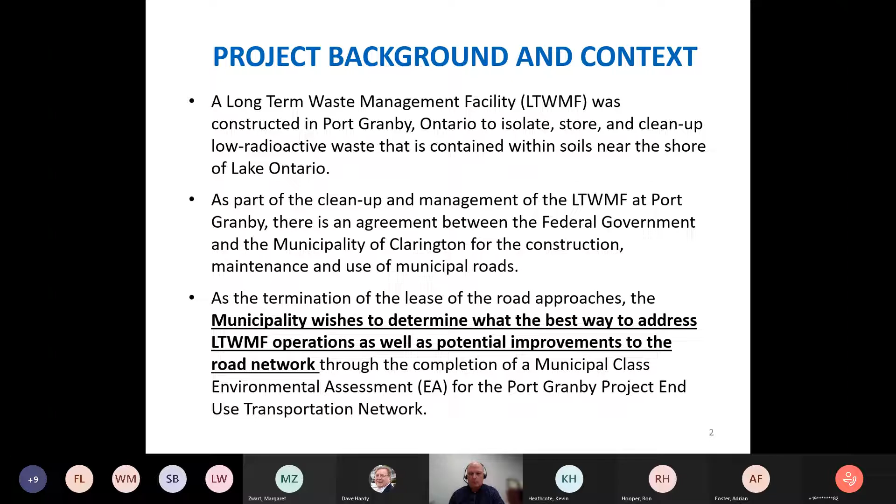Many of you are aware of the long-term waste management facility history to address low-level radioactive waste in the area. As part of this work, there is an agreement between Clarington and Canada relating to the roads in the area. As the end of this lease for Elliott Road nears, Clarington, through the completion of the municipal class environmental assessment, would like to determine the best way to deal with the low-level waste management facility operations and make improvements to the Clarington road transportation network in the area.

Slide number 3, long-term management plan. The Port Granby project is nearing the end of its construction phase and will be moving into the maintenance and monitoring phase, which will require CNL to continue to access the site for the long term. Access to the site is currently provided through agreements for use of Nichols Road, mainly for monitoring, and Elliott Road, which is the primary access, and which lease agreement expires at the end of April 2022.

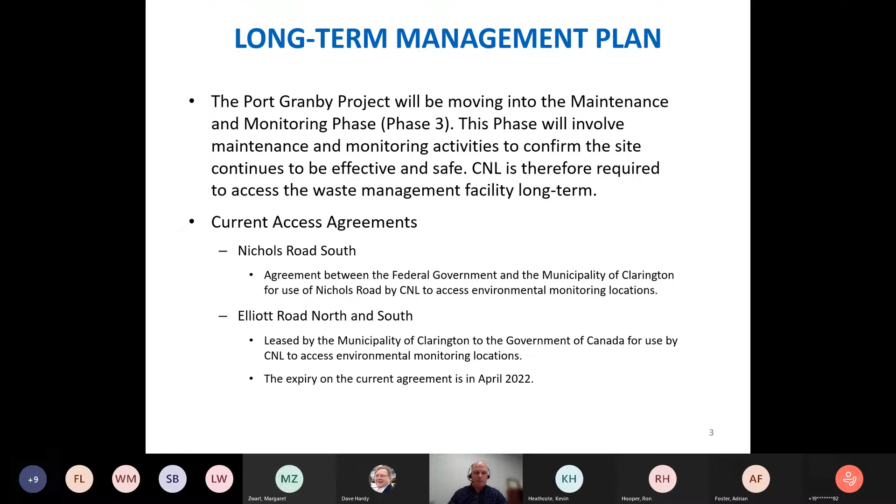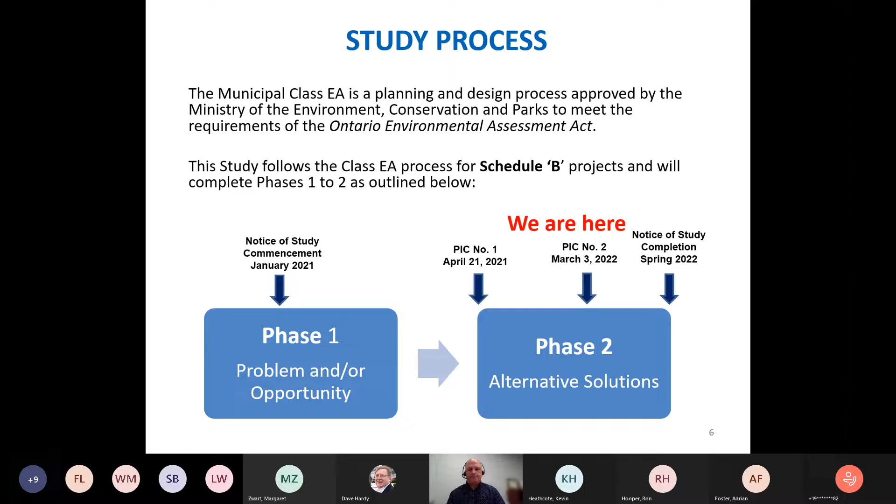Slide number 7. This is a slide showing the study area with an outline of the boundaries with Concession Road 1 at the north, Lakeshore Road at the south, Newtonville Road along the west, and East Townline Road on the east. The study area considered is provided on the map here and considers access to the area from east, west, and north. Majority of the traffic will be coming from the 401 at Newtonville Road.

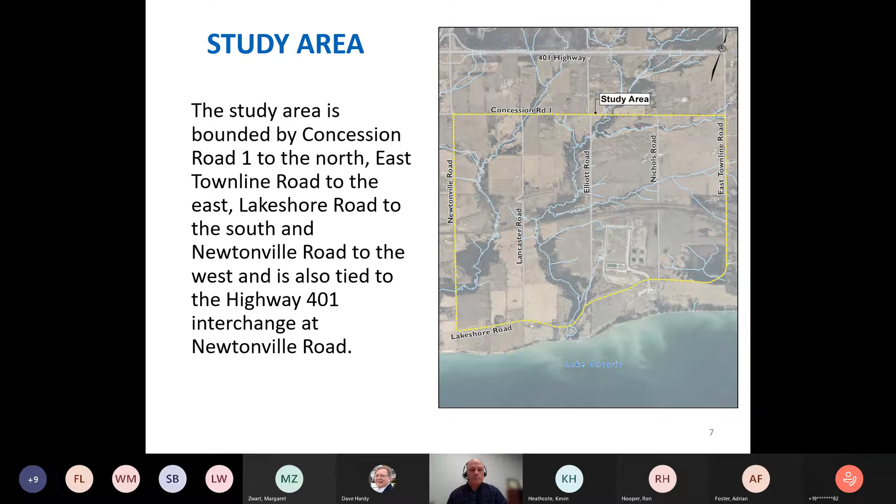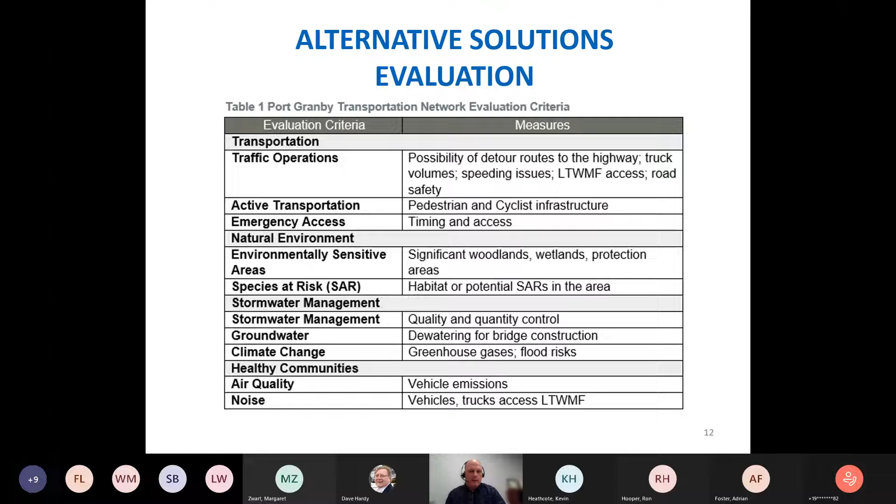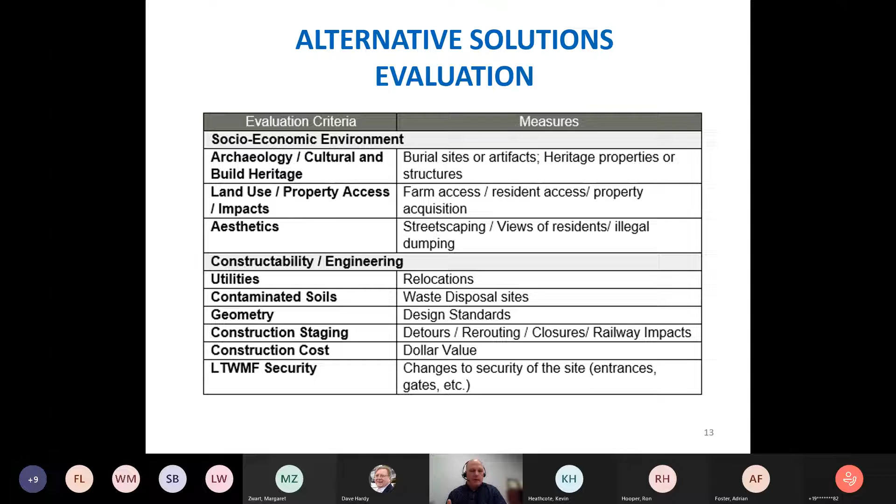Slide number 12, alternative solutions evaluation. This slide and the following slide depict the various criteria that were used in the evaluation of the four options. It includes such things as traffic operations, stormwater management, climate change, those sorts of things, as well as land use, property access, and construction staging and cost.

Slide 14. This is a summary table of the evaluation of the four options, summarizing the evaluation criteria noted on the previous two slides. Some options rated higher than others in different areas, such as option 2 had a higher rating for transportation, but lower in the impacts to the natural environment criteria.

The result of the evaluation determined that the do-nothing option, option number 1, maintaining the current Elliott Road arrangement, was the preferred option to move forward with.

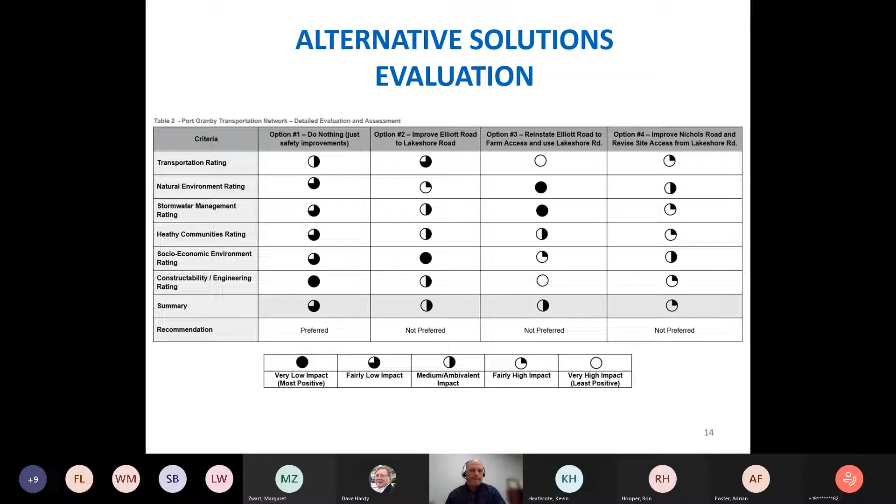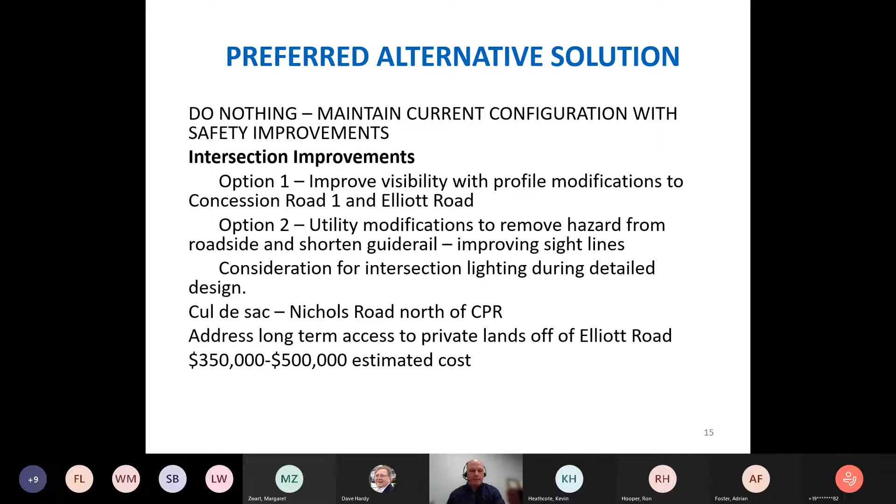Slide 16, preferred alternative solution. This slide provides a couple of photographs showing the visibility issues that are present at Elliott Road and Concession Road 1.

Namely, the sight lines looking westerly to oncoming eastbound traffic are obstructed by the presence of the guide rail on the south side of the road.

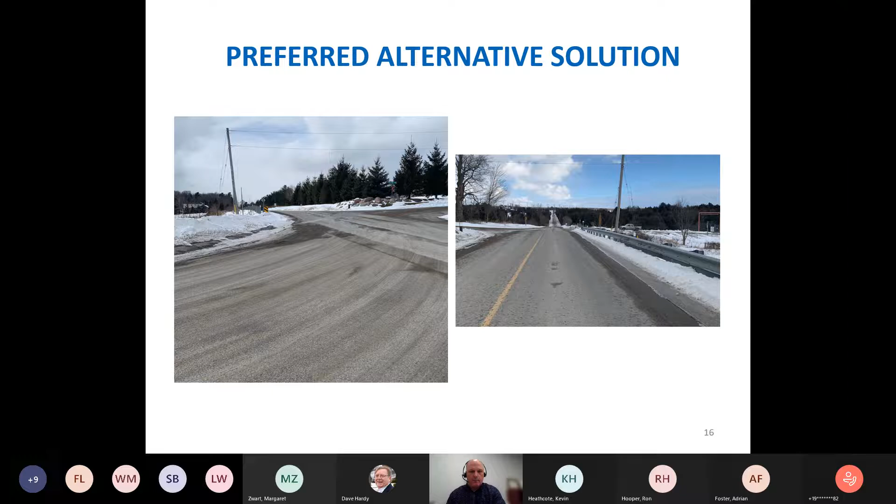Slide 17, preferred alternative solution. This slide provides an engineering drawing showing the improvements that would be made - geometric improvements to the profile of the road, flattening the curve to allow for better visibility.

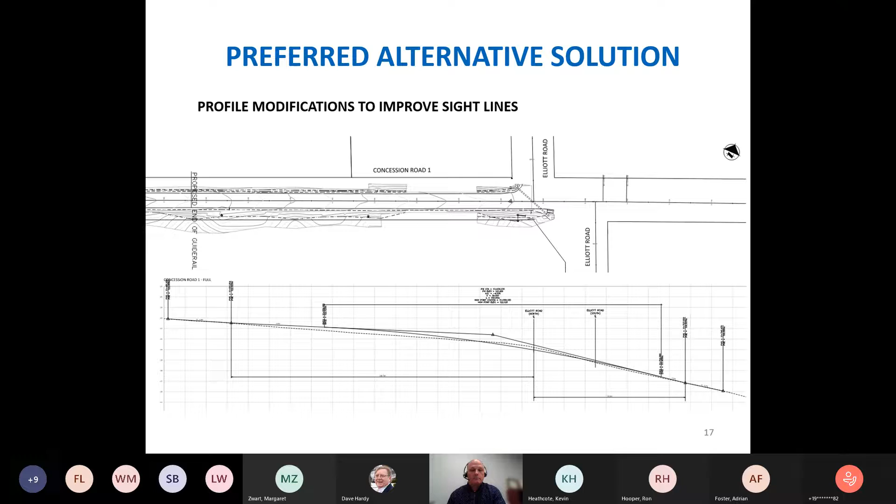With the guide rail removed, the sight lines for the intersection are greatly improved and would meet current road design standards.

Slide 19, preferred alternative solution, cul-de-sac at Nichols Road. This slide provides a map showing the location of where the cul-de-sac would be proposed to improve the current situation on Nichols Road north of the railway corridor.

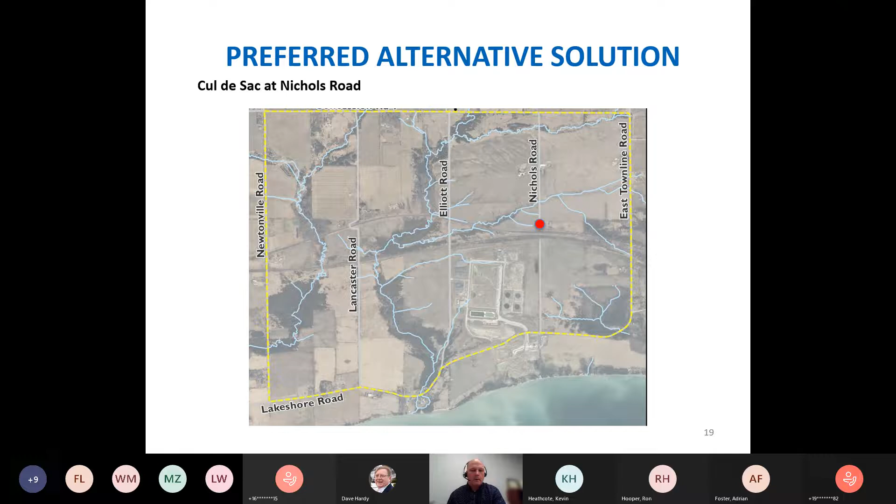Slide number 20, preferred alternative solution. This slide shows a close-up view with a preliminary conceptual design for a cul-de-sac at Nichols Road, north of the railway corridor.

And this is, again, preliminary in nature and could be revised to be an offset cul-de-sac to minimize impacts to property on either side of the road.

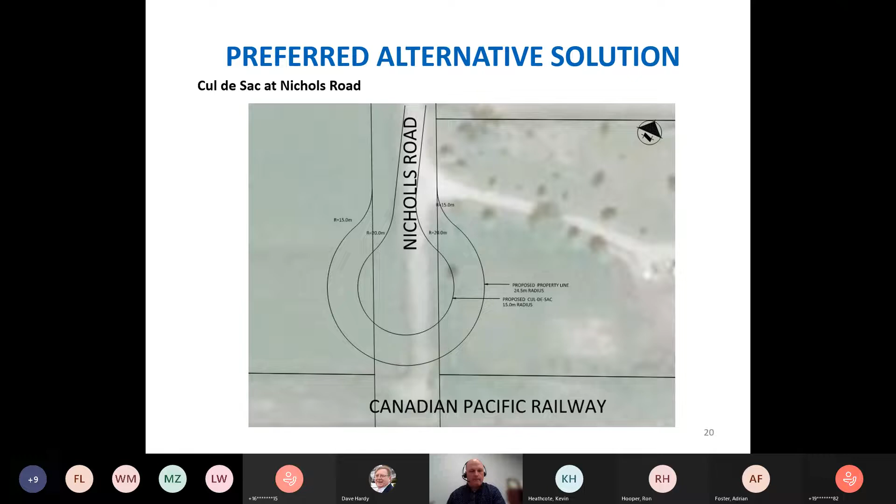Slide 21, preferred alternative solution. This slide provides a graphic showing the other concern that would need to be addressed, namely property access off of Elliott Road.

So currently, while the two northern properties have access to Concession Road 1, access to the balance of the properties is limited due to the presence of a drainage course through the area.

So continued access off of Elliott Road would be required so that farming operations that occur now can continue to occur. A similar situation for property access is noted at the south end of Elliott Road, just north of Lakeshore Road.

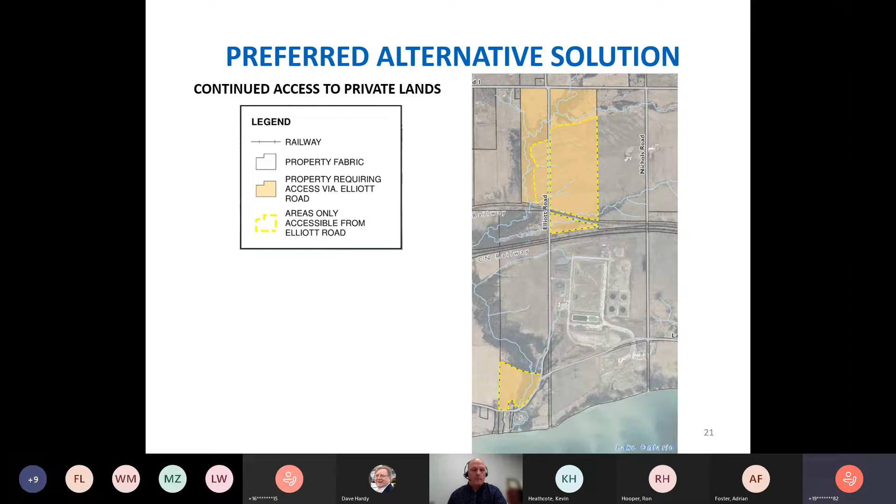Slide 22, next steps. This slide provides a summary of the next steps in this process.

Assessment based on the comments received from the public and other stakeholders from PIC number 2 information, they'll finalize the preferred design concept, and then we would look at finalizing and filing the project report to the ministry.

Circulate a notice of completion to notify that the process is completed. And again, it would be submitted to the ministry for consideration and completion of the EA process.

There is the opportunity to provide input via the website or to either of the email addresses provided on this page, to the manager at Clarington, Kevin Heathcote, or myself.

And if we could ask that this input be provided by March 17th, that would be appreciated so we can move forward with finalizing this EA. Thank you for your time, and that is the end of the presentation.

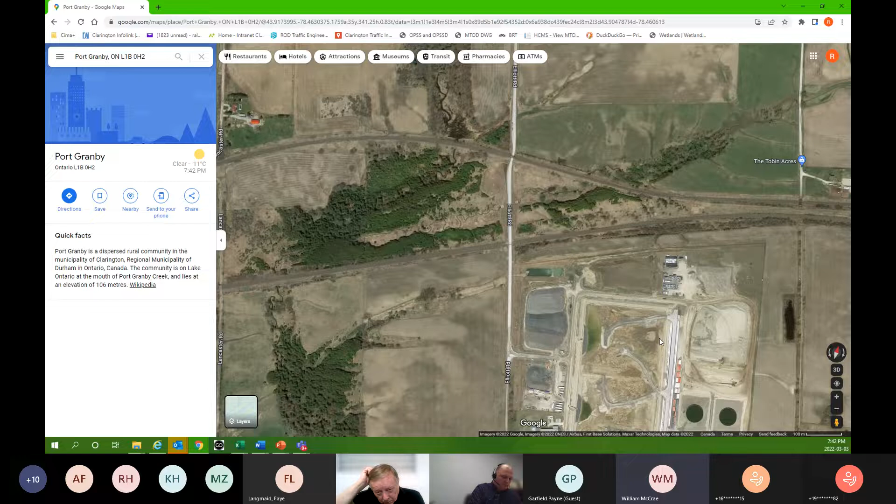I'm not entirely sure how long the monitoring program for the stream needs to be in place for the site. There is ongoing monitoring that will occur beyond this stage, but do you know how long that duration might be, Will? Yeah, those requirements are really part of the EA and would be the responsibility of CNL, so CNL staff would be able to answer those questions for us. But there is a long-term monitoring component to phase 3 of the project, and as Ron says, CNL can clarify what those timelines might be.

Can I ask the CNL staff on the line to make sure you follow up with our questioner to give them the response to that question after this PIC? Yes, I will. No problem. Okay, Dave, good, yes, thank you. Okay, we have another comment from Brian and Penny Strip.

Where exactly will the south end of Elliott Road come out to Lakeshore Road? Will it be where the gate is presently on the north side of the road?

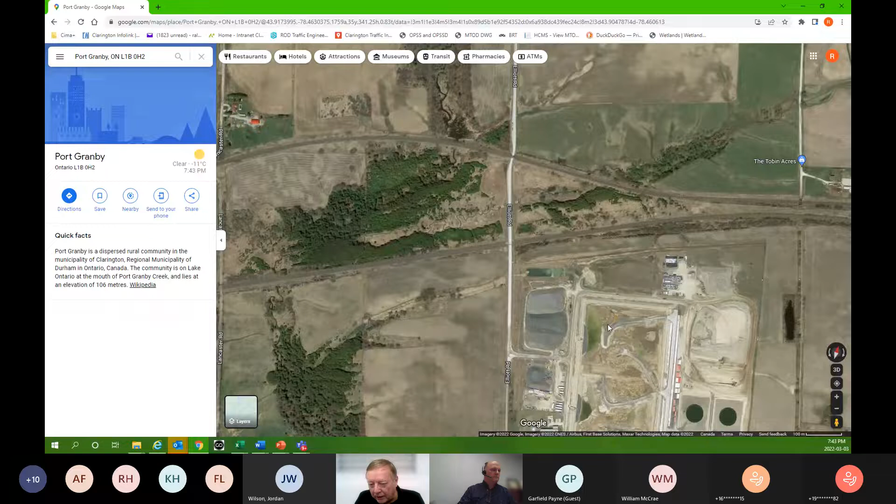So, through the original alternatives that were considered, we did consider both options: it coming out at its current location, or the alternative of it coming down Elliott Road, veering east and tying into the existing driveway, with the property boundaries adjusted accordingly to ensure the facility was still fenced and not accessible to the public. Through this evaluation, that option has been ruled as not preferred, and we're considering the current arrangement as the preferred option we'd move forward with.

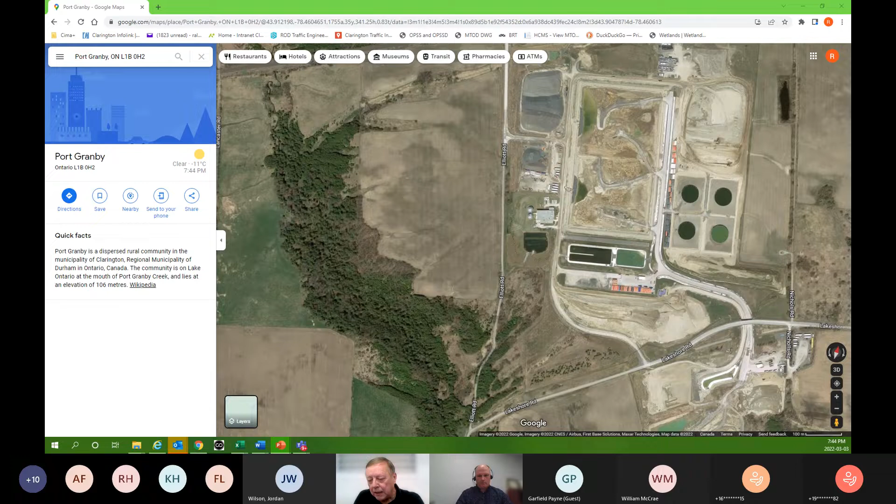So Ron, just to pinpoint their question: where exactly will the south end of Elliott Road come out to Lakeshore Road? So you've explained the thinking behind it, and it will come out basically where it's coming out now, is that right? Sorry. Yes, under the do-nothing situation, it will remain exactly where it is now, and no alteration will be done to it.

It will remain gated to deal with the illegal dumping, but it is accessible if there is a small property on the south end that gains access from Elliott; that would still be permitted. Okay, and I know we heard about that on the first Public Information Center, about the need to provide that access. For those of you on telephone, Ron had put the alternative route solutions slide up.

So Garfield, I know you have your hand up, I'd be happy to hear from you. Yes, will the underpass under the CP tracks, which goes down Elliott Road to the facility, be widened, or are there any plans to change it or modernize it?

I think it is probably 100 years old. Short answer is no. That was one of the things identified as part of the evaluation. Upgrading that was not part of the considerations, so it would remain as it is. It would be replaced as CP sees fit as part of their ongoing maintenance for the rail corridor, but no improvements would be made as part of this undertaking.

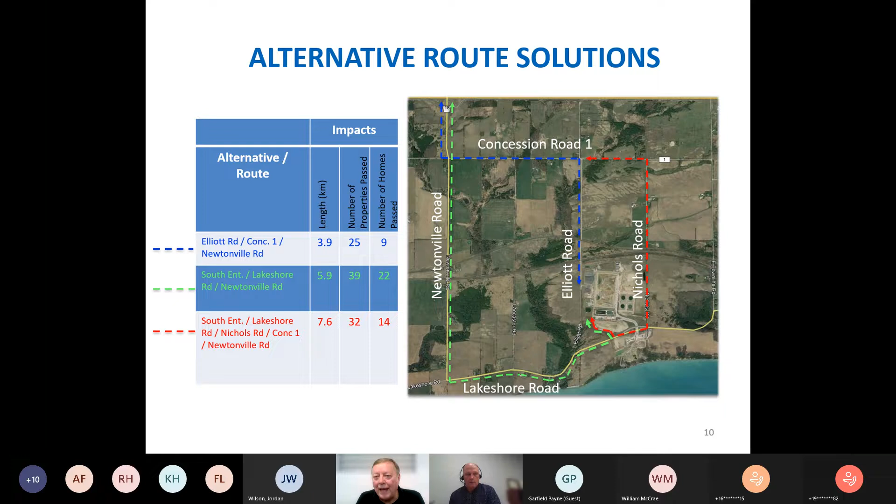I'm going to slowly move to completing the public information center, but I want to allow more ample time for any comments or questions about what you've heard tonight.

Garfield, I'll see your hand up again. Yes, it just jogged my memory. There was Clarington proposed work on the replacement and enlargement of the culverts through the stream that becomes Elliott Creek, as it passes east of Elliott Road in that little gully. I never heard any more about when that was going to happen. I did have some discussions with Clarington staff, but are you aware of when that work is going to be done? Yep, that will be done this summer. After July 1st, there are some fish window restrictions that don't allow that work to happen until between July 1st and September 15th.

So it was delayed last year, a bit late, so it was deferred till the summer of 2022. It will happen this summer, as well as there's a culvert, not related to the EA, just at Lancaster Road crossing concession that will also be done. Those will be coordinated so they're not going at the same time, and access will be available either from the east or the west to get to the facility.